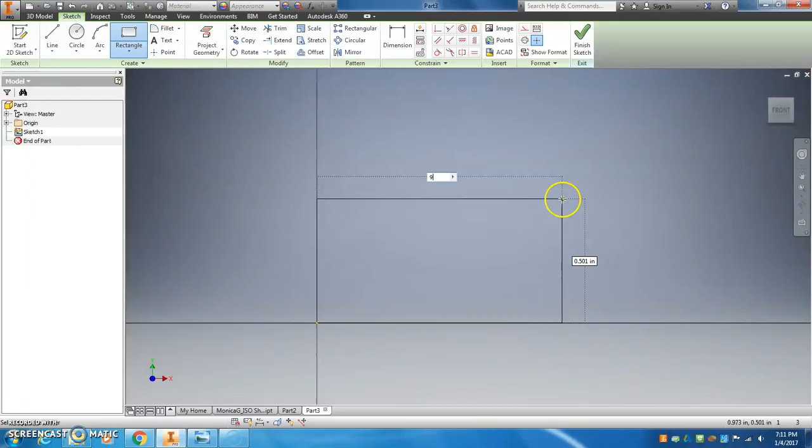So this box was, if I count from corner to corner, 1, 2, 3, 4, 5, 6, 7, 8, 9 long, and 1, 2, 3, 4, 5, 6 high. So the first thing we're going to do is go into Inventor and create a 9 by 6 box. So 9 long and 6 high.

And remember to go ahead and pause these videos anytime you need to catch up and do this along with me. So I'm actually going to go ahead and pop back into Inventor. Nope, because I need to finish my sketch. Well, I'll go ahead and finish this. Finish my sketch and let's save this.

So you're going to save it on your Y drive, which I've already done, so I'm in there already. And I'm going to call this, you want to use your first name and your last initial underscore, and these need to be called ISO shape. This is number 6. Okay, so that's saved. Now if our computer crashes, we have our work.

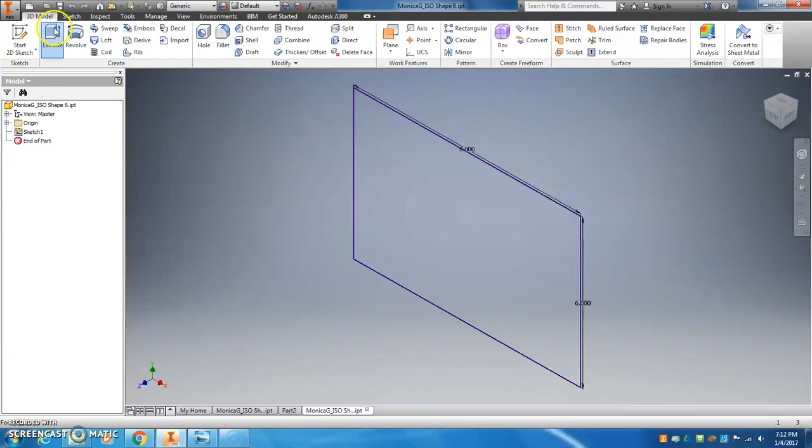And so we already made it 9 by 6, and we need to know how deep it is. There's a lot of ways to count this. I'm going to count from corner to corner, 1, 2. And if I go down, I have 1, 2, 3 more. So it's a total of 5 deep. I can also count from here, 1, 2, 3, 4, 5. So if I go back in Inventor, I'm going to extrude this and make it 5 inches deep. So this is the big, huge block before we're going to do some things to it.

There are 2 ways you could order this. We can cut this piece out and then chamfer or slice it off, or we can slice it and then cut out this piece. So I'm going to show you both ways. The first way is to cut out this piece first. So this piece is 1, 2, 3, 4, 5, 6, 7 long and 1, 2, 3 wide.

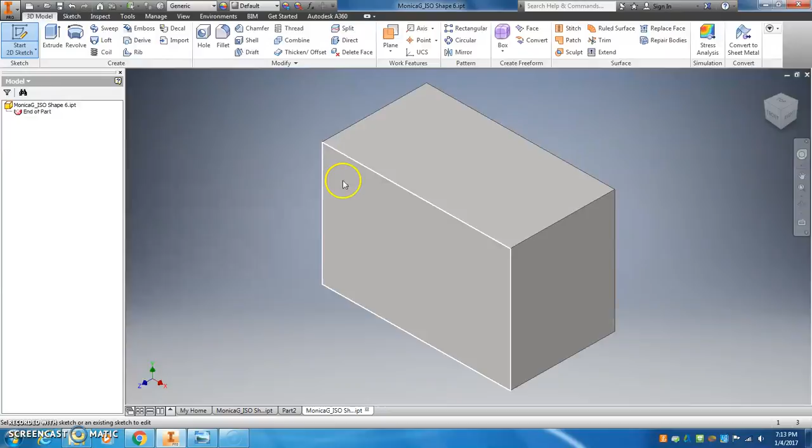So we're going to go into Inventor. I'm going to start a sketch. I could do it on the front and I could do it on the top. It doesn't matter. The dimensions are actually the same. I'm going to do it on the front since that's what we just counted. Is that what we just counted? No, we counted it from the top, 3 in. So it would be 7 by, it's also 3 high, 1, 2, 3. So that's what I'm counting now.

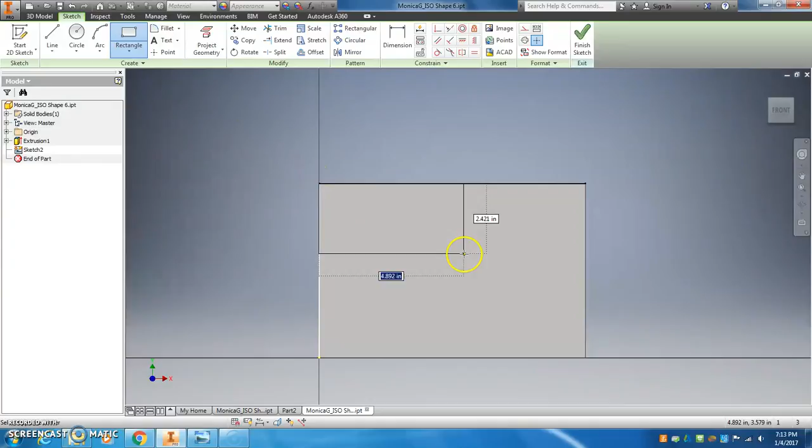A rectangle from the corner, because I'm doing this cutout, so it would be starting from this corner actually. So wait until it's green, and I'm going to go over 7 and down 3. Okay, so that's the size of our cutout. Finish the sketch, and I'm going to extrude it inward 1, 2, 3. So you can see the height and the depth of that cutout are the same. So extrude, going the other direction and going 3. And that's the size of our cutout.

And this does not look like our shape yet because we've got this whole piece here that shouldn't be here. So now it's time to use the chamfer tool. The chamfer tool is going to let us slice off at an edge. So I'm going to click on this edge, and then I'm going to show you a couple different options. If I hover over this, the first option will say, I'm waiting for it to tell you. The first option just has 2 D's, which means the same distance in either direction.

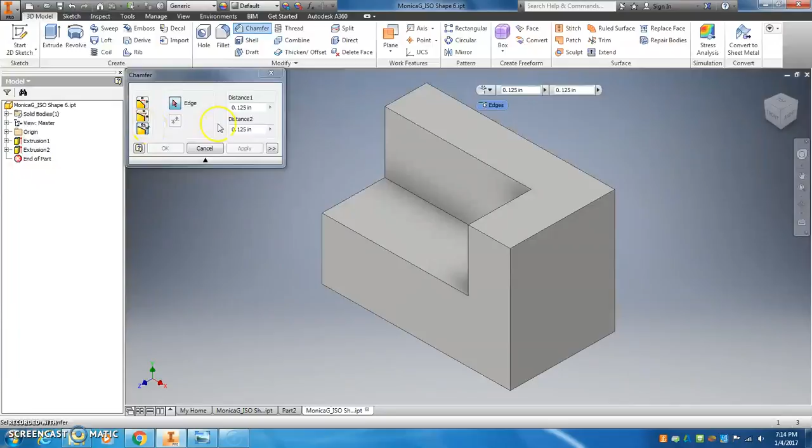The second option has a D and an A, which stands for angle. And then the third option has a D1 and a D2, and that stands for 2 different distances, and that's what we want in this chamfer. So once you select 2 different distances, you can select your edge, and then the first dimension is showing you that it's going in this direction. That's what this arrow is showing you.

So I need to know how many it cuts back from when the corner was originally there before we sliced it. That's what these lines are telling me. So it cut back in this direction 1, 2, 3, 4, 5. So I could just type in a 5 here and that would do the trick. Whoops, I'm going in the wrong direction. The gold arrow was telling me which direction it was going in. So let me change that back to 0 just so that you can see. This first direction is actually showing me the gold arrow. So I'm going to change it to this direction, which is what we were just counting, which we said was 5.

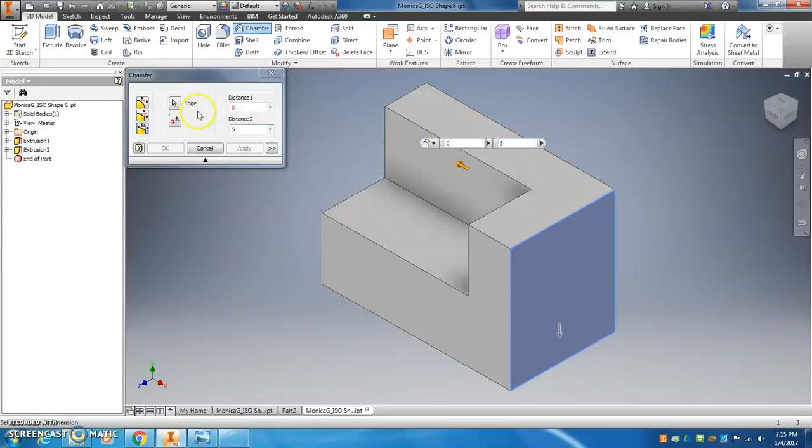So if I type that in, oh, it's not showing me now. Let's cancel and start this over. Chamfer, 2 distances, clicking on this arrow, and 5 is going in this direction.

So another way that I could enter, oops, it's this one, the gold one. So another way I could enter that 5 is to see that there are 1, 2, 3, 4 remaining after I slice in that direction, and my original one was 1, 2, 3, 4, 5, 6, 7, 8, 9. So I can put in 9 minus 4 into this box, and it will do the math for me. So that's another way to input numbers if you don't want to have to count it all or subtract it in your head.

Okay, so we got 9 minus 4. And in the other direction, going down, we sliced off all the way. Notice it comes all the way down to the edge, which was the whole 1, 2, 3, 4, 5. So in that direction, it's already set up correctly. And you can see the preview, and that's what it's going to look like after the slice, which is not what our shape looks like.

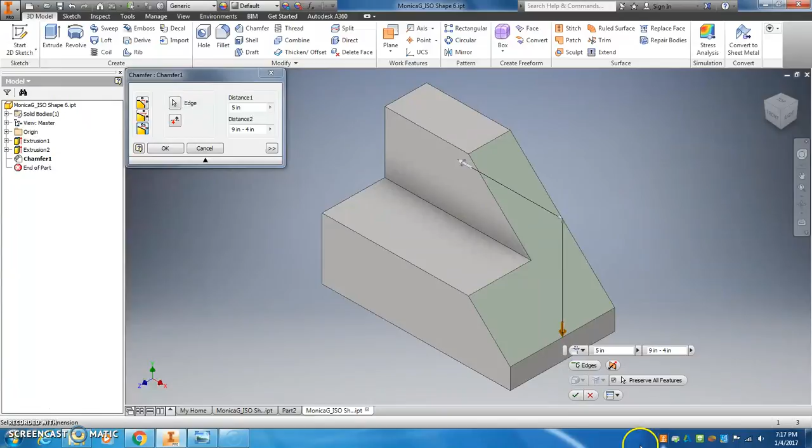So let me go back to our chamfer. I must have counted wrong there. Edit the feature. So we have 5 going down and 9 minus 4 going up. 1, 2, 3, 4, 5. And I must have made my original shape too tall. 1, 2, 3, 4, 5. Let's see what my original shape was. Oh, I have a 9 by 6.

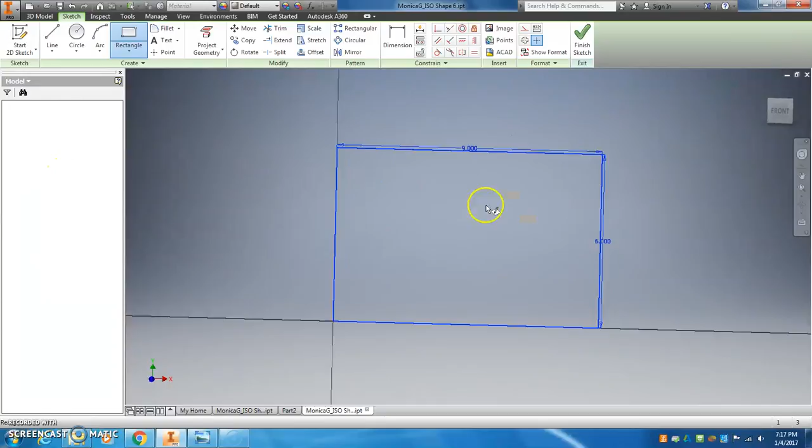Okay, this is a good opportunity to learn how to fix something. So my first extrusion that I made was a 9 by 6 box. So if I click on this plus, I can see the original sketch. And if I right click on the sketch and click Edit Sketch, now I can simply double click on the number 6 and change it to a 5. And now it's going to fix that entire object that I just made.

Bam! So as you can see, I made a counting error in the very beginning when I was making the original 9 by, I said 6, but it's 5. So if you caught that when I was doing it, then you may have made your rectangle correctly. If you didn't, then you can correct it with me.

So I'm going to show you now the way to do that shape in the reverse order. And to do that, I'm just going to get rid of the last 2 steps that we did by moving this end of part. So it's basically saying that didn't happen and that didn't happen. So I'm back to my block. And now I'm going to do the chamfer first.

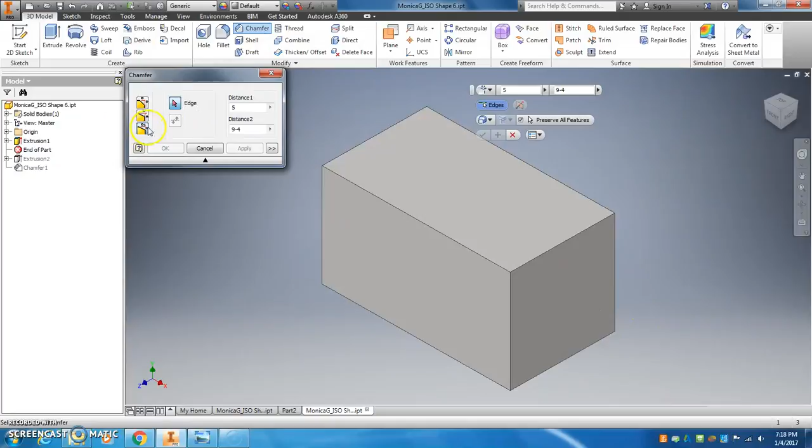And we already know that it goes 5 in this direction and 5 down, which is actually just 1 distance, so I wouldn't need to use the 2 distance tool. 1, 2, 3, 4, 5. It's not a bad idea to always use it because it lets you control more of your chamfer, but I have again 5, and I could just do 5 or 9 minus 4. And I'm going to say OK. So now I just have 1 face, and then I still need to do this cutout.

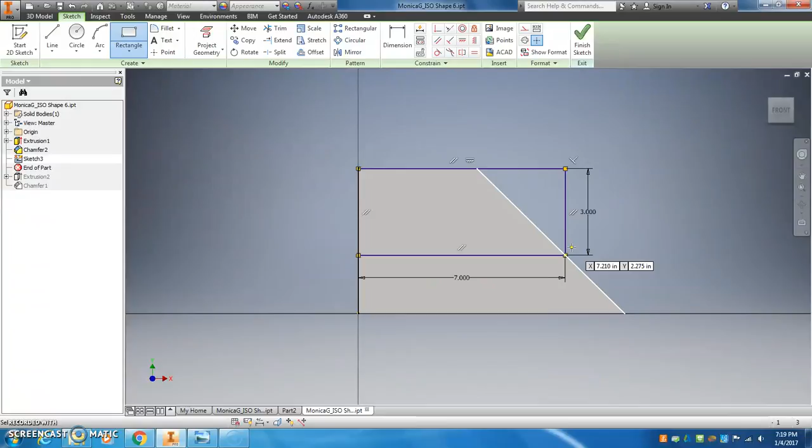And to do that, I would just do a sketch. I could do it on the top, I could do it on the side, it doesn't really matter. And we already know from our previous counting that this rectangle is going to be 7 across and 3 high. And when we finish and extrude, we're going to cut inward again 3. That was what we counted earlier. And now we have the same object that we had when we went in the reverse order.

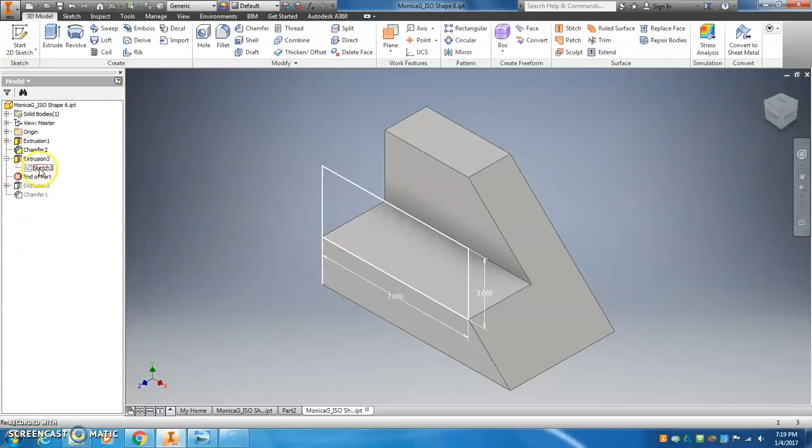You could also make this box bigger than 7. You just have to make it at least as long as the cutout needs to be so that it goes into this already sliced off edge. So sometimes the order of the steps that you do matters. So if you try something and it doesn't work like you wanted it to, you can reorder your steps and see if that helps.

So when you're looking at these shapes, you need to think about, what do I want it to start out looking as? What can I do incrementally to make it start cutting off and cutting out and locating things so that I end up with the shape that I want?

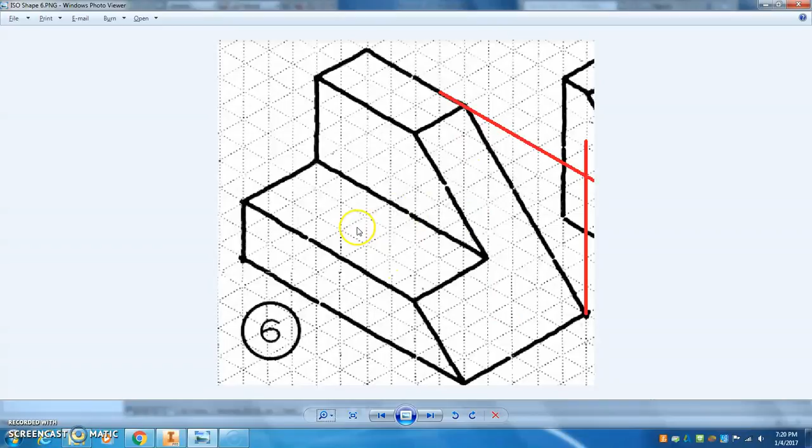And once you finish this, you need to save it, and you need to take a screenshot. You need to come over in Hapara into Unit 4 ISO Shapes Assignment 1 and paste in, and this should actually say ISO shape number 6. That's what we created. So you're going to paste that in the box, and then you're going to teach your partner how to make shape number 6.

So they're going to make it on their own in Inventor, and they're going to paste their number 6 in their box. And when you finish, you should each have made shape number 11 and 6 and learned some cool new tricks like filleting, chamfering, locating features. And that's all there is to it.